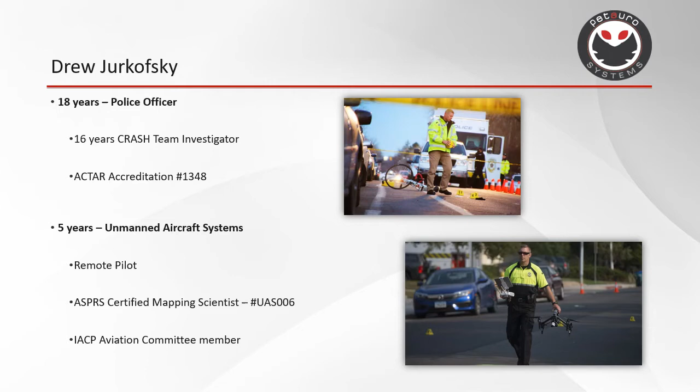I was also recently certified as a mapping scientist through the American Society of Photogrammetry and Remote Sensing. I also stay active in several different committees, one of those being the Aviation Committee for the International Association of Chiefs of Police.

So to get started, let's talk a little bit about how we have always investigated traffic crashes in the past. When I started doing this, we were using everything with measuring tapes, whether it would be tapes on the ground, whether it be roll tapes. Eventually, we graduated onto total stations, and honestly, my agency today is still using total stations for most of our measurements. A lot of people will say that once you get drones, you can throw your total station away, and that's simply not the case, or at least has certainly not been my experience.

All of our aerial imagery in the past has come from fire trucks. We were lucky enough to work very closely with our fire department. They would bring a fire truck out and let us take aerial images from that. This was really good for demonstrative purposes during courtroom presentation, but it wasn't useful for metric and measurement sort of use. I could show you the picture up here and explain that these were tire marks, that there were striations in them, and what that meant as far as the dynamics of the vehicle. But I couldn't tell you exactly how much distance there was between either one of those tents.

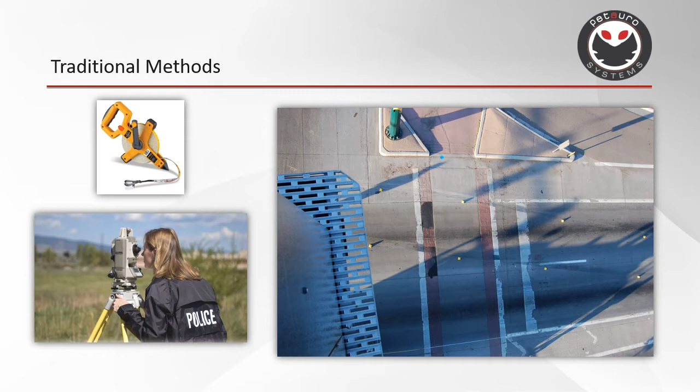The problem with fire trucks tends to be that we can't just put them anywhere. They can usually be set up one time. We can take aerial images for whatever the ladder can reach. But we're not going to put these in people's backyards, and the firefighters probably aren't going to let us move these multiple times because it just takes so much time and energy on their part. So this is what we had. So now what are we moving on to from there?

In 2014, I participated in a cooperative research and development agreement with the National Institute of Justice. At the time, NIJ was very interested in using drones for faster traffic accident clearance. We've all heard the case studies, and we've heard many times how drones increase the efficiency of the investigation on scene and the accuracy of the product. In 2014, that wasn't the case. We didn't know how drones could be used or if they would be useful.

A big part of this study was determining the appropriate level of overlap, testing different altitudes for image resolution, and developing methodologies for collecting this imagery and checking to see what our actual errors were, and then comparing those accuracies with current methods, and then timing that to see what the efficiency was compared to current methods.

All of this culminated in several different mock traffic accidents where we did head-to-head comparisons with a normal crash team investigation. In those different studies, this mock accident would be set up, and the traffic team that we were essentially having this competition against would get timed from when they could open the doors to collect all the equipment out of their vehicle, set it up, collect the measurements that they needed, pack all their equipment away, and shut the door. So essentially door to door. And then the same time was taken for the drone. How much time did it take to set it up, to mission plan it, to fly it, to break it down and put it away?

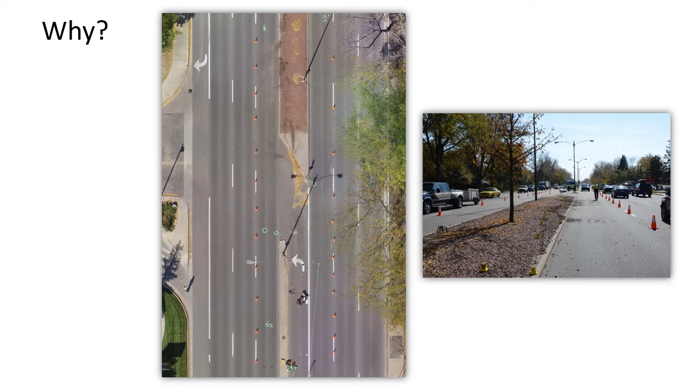So you've seen some of the pictures and the ortho photos, but why is it that we're using drones for crash investigation? Well, the first reason I would say is for efficiency, that it does save us time in doing scene diagrams for us to use drones instead of traditional methods. That said, please, please, please do not go to your bosses and tell them that you're going to be able to map a scene and clear it in 15 minutes or a half an hour or an hour.

It doesn't mean that we're not going to still do all of our normal traditional ground processing that we would. We still have to identify the evidence. We still have to take close range pictures of it. We're not going to get pictures of fibers or skin or blood on the roadway like we would on the ground taking these pictures from the air. So we still have to do all of the normal evidence processing and collection that we would on the ground. Where this saves us time is when we go out to measure the scene.

This is a crash that we investigated that was on a major thoroughfare through our city. It has 3 lanes in both directions. For us to have measured this with a total station would have easily taken us probably 2 to 3 hours if we wanted to get all the lanes and if we wanted to get all the sidewalks, etc. This was a motorcycle that was heading down the road, lost control in the center of the street, rolled into the center median. The driver, unfortunately, was not wearing a helmet and was killed at the scene.

As you can tell from the image on the right, this was in the middle of the day. This was right around 1 o'clock in the afternoon on a weekday. We had traffic absolutely snarled. We were trying to break down 1 lane in both directions. What I asked my supervisor in this particular case, this is actually the one that really got us motivated as a team to show what the capabilities were. I asked my supervisor to give me 5 minutes after we had the opportunity to mission plan all of this to shut down the entire roadway so that we could map it and then open the roadway again.

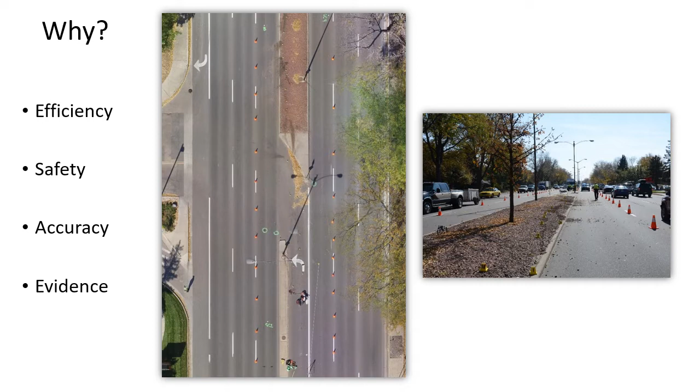This particular presentation is geared toward traffic crashes. In a traffic crash, we're almost always trying to create a map that's for measurements and for criminal prosecution. That means that we're going to have to be able to walk into court. We're going to have to be able to give some sort of an error estimation as to what the error of the map and the error of our measurements are. It's going to be critically important as we're moving forward for this to be adopted in most of our courts.

So let me give you a case presentation. This will be a step-by-step example to show you how it is that we're using this technology and how I believe other agencies can use it as well. So this was a traffic crash that happened in a rural part of our city. You can tell this is a Pix4D example. This is kind of the Pix4D map that you would see once you import your data.

What happened here is there was a Corvette with a couple of young men in it that were out driving around at nighttime. Of course, they were driving above the posted speed limit with their Corvette. They went through this cross intersection and didn't realize they were approaching a stop sign. By the time they did realize it, they could not stop, and they hit a vehicle that was traveling southbound through that intersection. They had the right of way, broadsided them, ended up killing both people in that car.

This happened at nighttime, as I said, and since this was rural, this was a very dark area of the city. So I'm showing you an area that was dark, and what that would turn out looking like. A little bit closer in, I wanted you to see the flight paths that were flown for this particular mission. So there were, I think, 3 different flights that were done. The first was a nadir flight, which was looking not perfectly straight down. It actually was about a 70-degree angle. But you can see the single grid kind of lawnmower pattern that we're used to seeing back and forth.

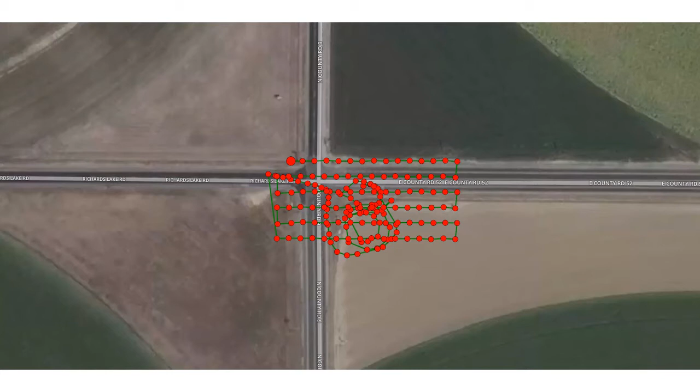After that was flown, we flew oblique patterns around both of the vehicles that were involved. And then all the other spaghetti stuff you see in there is us taking some manual imagery, flying through the scene and trying to take some images as we're going toward the vehicles. This is what it looks like once we bring it into Pix4D. So you can see the 2 different flight altitudes that were used. Primarily, I believe this was flown at about 75 feet for the nadir-facing imagery, and then about half that, usually right around 35 feet when we're flying these obliques. There were very few obstructions in this particular case, so we were able to fly a lot lower and keep everything at about the same altitude.

All the points that you see at the bottom there are tie points. Tie points just mean that those are pixels that are similar in at least 3 or more images. So photogrammetry is going to tie those pixels together. It's called a tie point, and there tends to be 1,000 or more of those per image. So it's actually a very robust model for taking measurements once we've quantified what our error is.

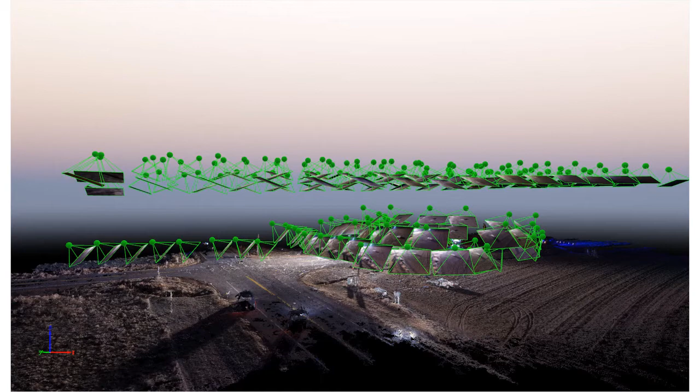So let's go through the nuts and bolts of how we're going to measure this scene while we're there. We're going to need to be able to scale this map as well as quantify the error for us to use later. So the first thing we're going to do is set ground control. Ground control is spread throughout the scene. Typically, we want to have it on the 4 corners of where we want our map, as well as something in the middle. Our agency typically uses 5 ground control points for most of our scenes. Unless you happen to have a scene that has multiple acres involved, you can usually get away with this number of ground control points for, say, a 1,000 by 200 foot scene.

Ground control targets are labeled here for you to see. If you look really closely, you can see the little pins where Pix4D has placed them because I've marked them in the images. But the way we mark this on the scene is actually very simple. We went to Home Depot. We got some circular white furniture movers. We put a little dimple directly in the middle of those furniture movers. We used some double-sided tape, stick them down on the asphalt, and then we label these 1 through 5 for our 5 ground control points.

We're going to take our total station, put the tip of our prism rod right in the center of that dimple of the target, use a stabilized prism pole, and then we take measurements to it. That's going to be our control, if you will. That's the known. And that's how we're going to set the coordinate system, and that's how we're going to scale this. You can use a traditional total station with an arbitrary coordinate system, or if you have a GNSS system, you can also use latitude, longitude, and elevation, whichever one you're using. But again, this isn't anything super hard. It's more a matter of where you place them and making sure they don't move once you've measured them, so you get them in the imagery.

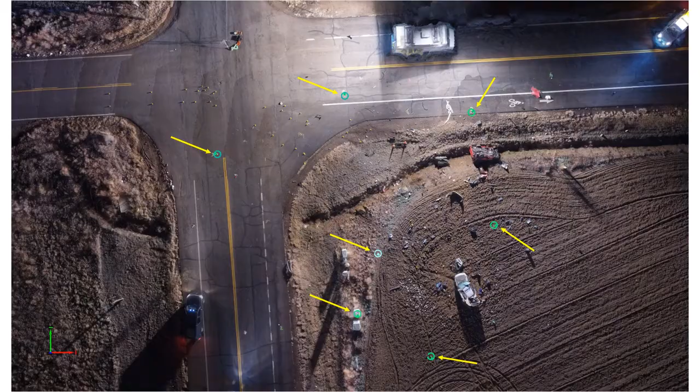Once we've collected all of our data at the scene with our total station, this is essentially what the layout is going to look like on a diagram. So you can see the different ground control points and their spacing. You can also see the different checkpoints. Checkpoints, we typically label those by alphabetic letters, whereas the ground control is by numbers, so that way our team can tell the difference between the two.

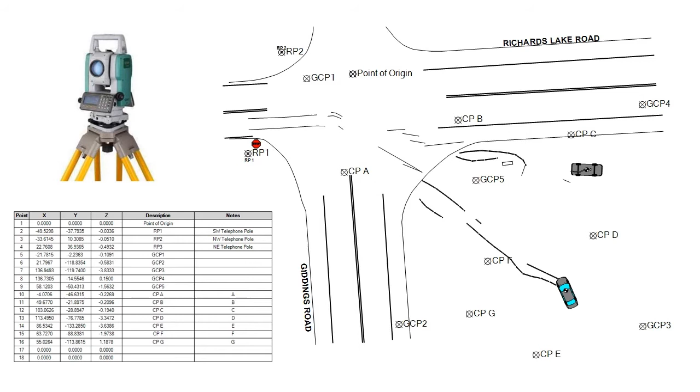You can see all the actual measurements underneath of the total station there for what we actually measured. This is really all the measurements that are done at the scene. We collect the measurements with the total station, we take the images with the drone, and we're done with taking our scene measurements. That's the amount of time it takes for us to do a scene diagram.

So when we get back to the office, we're going to put all of our imagery into Pix4D and we're going to process it. Once some initial processing is done, we'll be able to go in and mark our ground control points and our checkpoints to tell the software where those are located in the imagery. Once that's done, we're going to be able to generate a quality report. Sometimes that's done for us, sometimes we need to ask the software to do it for us. But I wanted to go through a couple of boxes in that quality report to talk about errors and accuracies.

So in this very first box, this is at the top of the report, it tells us essentially what camera we were using, what the sensor looked like, but it gives this value for ground sampling distance. So let's talk a little bit about that because I hear this used a lot. The ground sampling distance is the distance between the center of one pixel and the center of the pixel next to it at the ground level. So this is dependent upon the size of your sensor, your focal length, and the altitude at which you're flying.

This will change for a given camera at the altitude you're flying at, that the higher you fly, the higher your ground sample distance will be. This is not related to the error or the accuracy of your map. This is far more related to the resolution of what objects you would expect to be able to clearly see in your imagery. So just be aware of what that is telling you. In this particular case, we're at 0.38 inches.

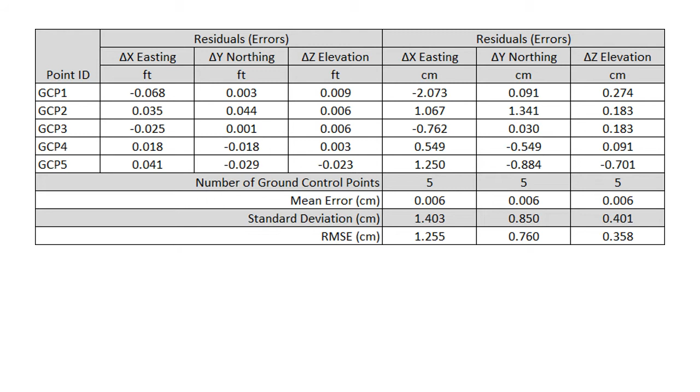Okay, so we're going to get in the weeds a little bit here, so don't gloss over on me just yet. So let's talk a little bit about the errors in this. I've just brought in the exact same thing you saw from Pix4D for the ground control points. So you can see our 5 ground control points over here on the left. We have our difference between what the total station says they should be and where the position was in Pix4D for the model. And there's some differences in all of those.

So essentially you've got this fixed model that can't move, and you're trying to make these 5 points fit on these known 5 points from the total station. It's kind of like all 5 points are on springs, and it's trying to find the best fit for those 5 points, and then it locks it in place. Because it doesn't fit perfectly, there's going to be some error for all 5 of those points, and that's what we're seeing here.

So we get it reported to us from Pix4D in feet. That's how I have our total station set, an arbitrary coordinate system in feet, and so that's why it's giving it to us in feet in Pix4D. I now have converted that over to centimeters, and as we go down towards the bottom, you can see that we have done some calculations for mean error, standard deviation, as well as the root mean square error. So what we're really interested in is the RMSE.

So by these standards for ASPRS, here's our root mean square error. Our ground control must be 4 times more accurate than our map class. So in this case, our greatest error is in the X direction. It's at 1.25 centimeters. So we have to be 4 times that. Our map class can't be any less than 4 times that number.

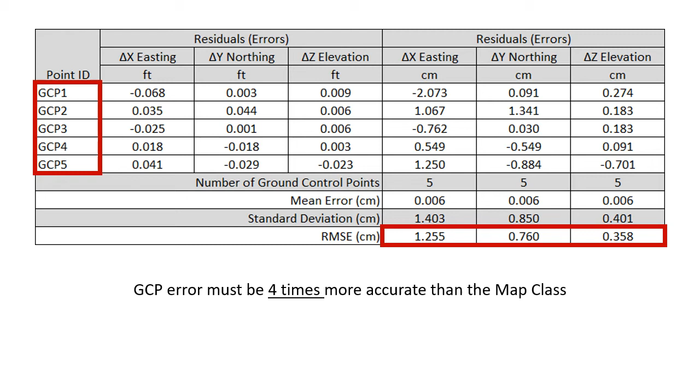So just to keep it simple, we'll just call that a centimeter to keep the math simple. So if we have a centimeter of error, it means that we have to go with a 4 centimeter map class. We can't do anything less than that because of that error rate.

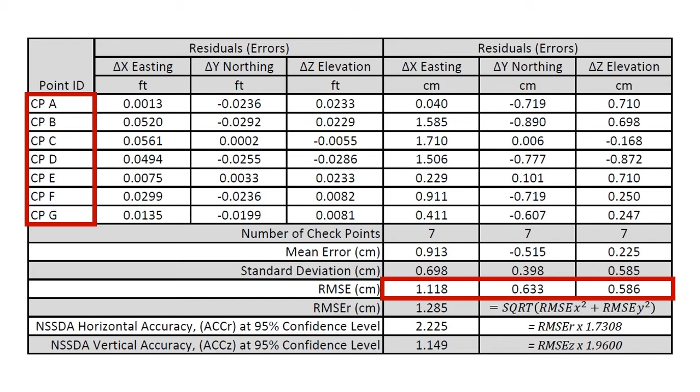So again, by ASPRS standards, this is supposed to be 3 times more accurate than our map class. This is actually better than that, so we definitely meet those standards. So you may stop and ask yourself at this point, well, doesn't that mean that all of our measurements are at least within 1.118 centimeters? No, that's not what this means.

This just means that for those 7 points, this is the average. It's not really even the average, it's the root mean square error, which is a slightly more robust calculation than average. This is the error of those 7 points. A point cloud is made up of millions of points. We don't know what the error is for all of those other millions of points. This is just telling us what it is for those 7.

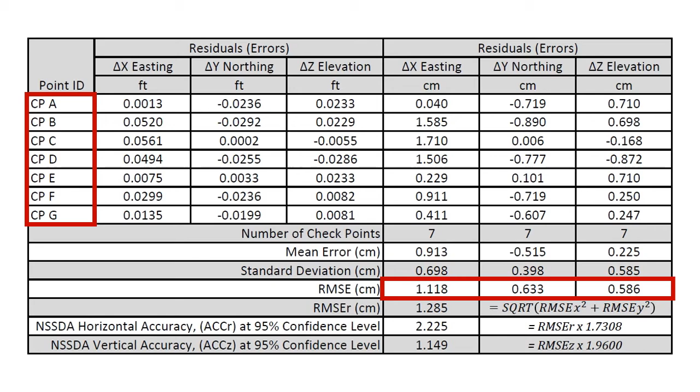So that brings us to our positional accuracy statements. What we just saw was the accuracy of our 7 checkpoints. Those are 7 single measurements within a point cloud of 1, 2, 3 million points. We can't possibly measure all of the points in our point cloud to know what the error is over the entire thing.

So what we have to do is make a confident statement based on a confidence interval. This is all going to be based on statistics, that we're basing this on the assumption that the error throughout our map is normally distributed, and that at 95% confidence or at 2 standard deviations, we can report that as a confidence interval. The math behind this is presented in that positional accuracy document that I showed you earlier through ASPRS, so I'm not going to get into it here.

Essentially, the statements we're going to be able to make are that the actual positional accuracy was found to be an RMSE X of 1 centimeter, RMSE Y of 0.6 centimeters, which equates to positional horizontal accuracy of plus or minus 9.7 centimeters or 3.8 inches at a 95% confidence interval. So essentially, any measurement that I make from point A to point B in my point cloud that's in the horizontal plane, I can say that it is this distance plus or minus 9.7 centimeters or 3.8 inches.

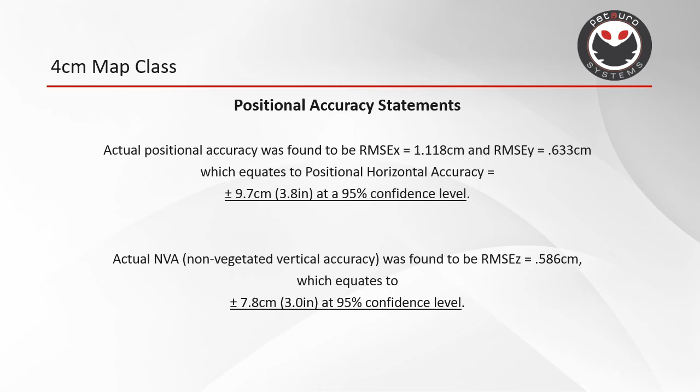Okay, so now we know what our map class is. We know what our error rate is. This is still back at the office. Now we can start building the rest of our reconstruction. So typically what we will do is we'll go and we'll mark all of our evidence points in Pix4D. You can see all the different tents that we laid out at the scene. We mark all these evidence markers in the picture, and we're able to show them here. This is just a quick screenshot.

So with these points, I can now export them out to whatever diagramming software I use. Your agency probably uses a different program than mine does, although we all tend to be fairly similar. But essentially, I can export this out as an XYZ data set, the same as I would get from my total station, and I can import that into any of my favorite diagramming software packages to create my wire diagram.

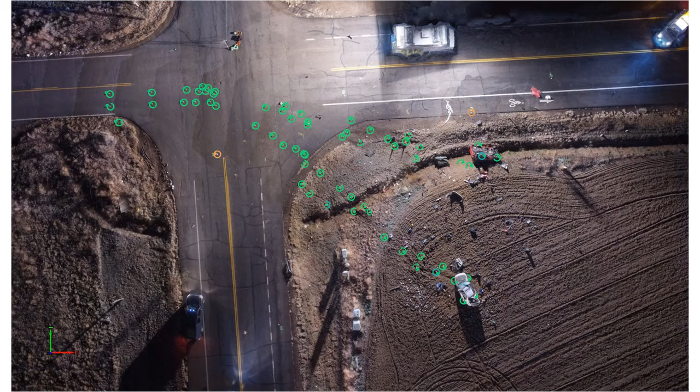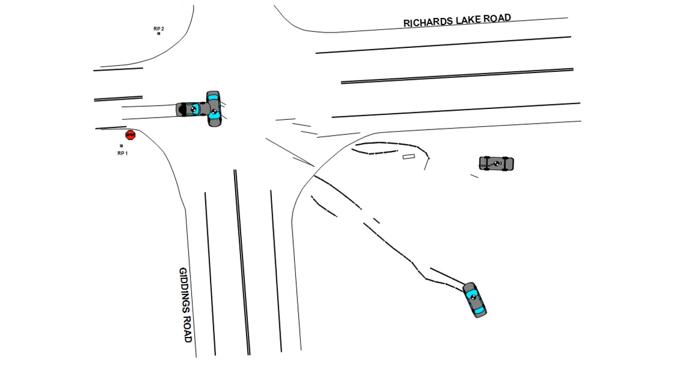So here's what our typical wire diagram looks like. This is what we've been using for years with our total station. This still works just great. I honestly, for a lot of my reconstructions, don't necessarily need all of the other data that comes with some of the imagery. This is really good for me to see how the vehicles hit one another, where they were positioned in the roadway. It's also really helpful for me to pick my angles, which way cars are going.

So when we're doing speed reconstructions, we need to know what angles vehicles are coming in at. We know what angles vehicles are going out at. I can very clearly see on this which direction each of those vehicles are going. The other piece of that puzzle, though, when I'm trying to do a speed reconstruction, is the drag factor. How much friction is there on the roadway? I can quantify the amount of friction for the asphalt surface. I can quantify the amount of friction going off into the dirt.

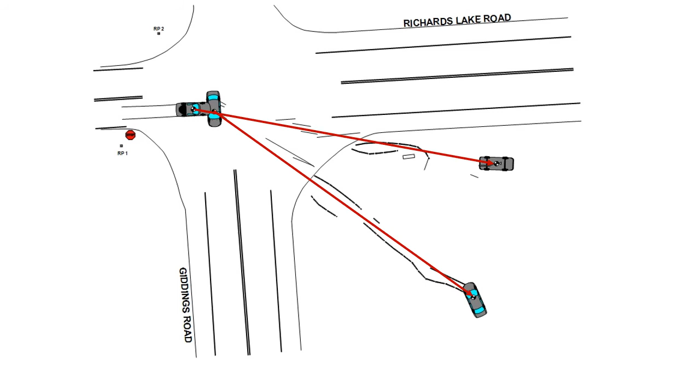But both these vehicles went through ravines. They both hit hard on the sides. One of them flipped over. One of them furrowed very deeply going out into this nicely plowed field. We don't have values for that. We're going to have to estimate it. And when I go to estimate that, there's going to be lots of experts who are going to have obviously different estimations than me. So I want to be able to explain to a jury why I chose the numbers that I did.

This is actually a more useful diagram when I'm trying to figure out what my drag factors are. Again, we can still see the vehicles at impact. We can still see how all the roadway markings line up with the evidence tents that were put out at the scene. But it's much easier for me to describe how each vehicle acted dynamically as it went through either the canal or the Corvette that hit that utility box and then flipped over onto its top.

All of those are going to be drag factors that I'm going to have to take into account, but I can better describe them and I can better calculate out the distance traveled through each one of those different scenarios based on this picture versus the other one. It's also useful for me to be able to show a jury exactly how much friction we're talking about. So in this particular case,

we can see that this car was coming off the road going almost sideways. It impacted right here on the side of this canal, spun, and then is furrowing fairly deeply going off into this freshly plowed field off to rest. So this is all going to be important for me to be able to explain to a jury.

Again, our Corvette over here goes off the side of the road. It hits this utility box, actually takes the box out, and then it flips over onto its top. So as I'm trying to explain to a jury what drag factors I used, this is a very useful tool for me to help them visualize how much energy would have been expended through each of these different routes.

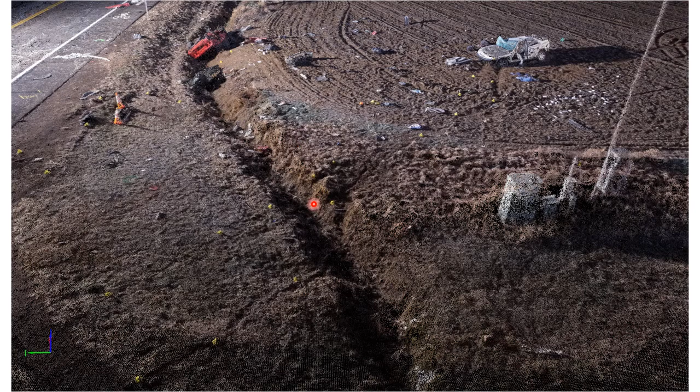When we talk about data and how much data is actually collected, what's nice about any photogrammetry software, again, this is the Pix4D version, is that we can collect measurements from the vehicle to anything. So in this particular case, one of the occupants of this vehicle was found just upward, I guess, from the vehicle in this particular picture. But if we want to know what the distance was, we can actually calculate that out. We can pick our points in space.

So as we were talking about earlier, every scene where we forget to take a measurement, or every scene where we didn't know there was information that was actually there that we find out about later, someone tells us, oh, that piece of debris was actually relevant that we didn't know at the time. We haven't lost anything. We can always go back. We can still measure it. We still have the same amount of error measuring to it. And we also have all these pictures of it, at least from the drone, that we can show where it existed at the scene. So we're not losing anything. We actually get far more data than we would have had otherwise.

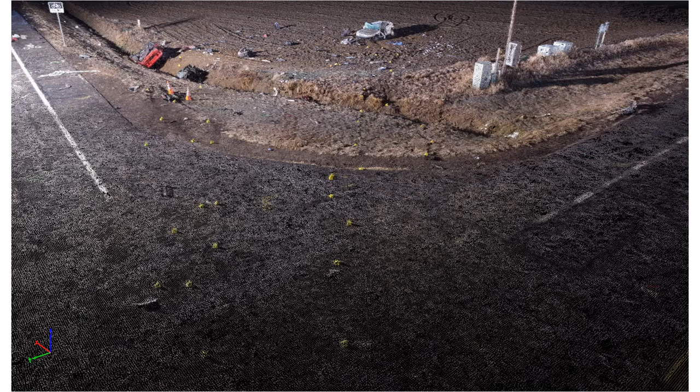One of the other deliverables is obviously a point cloud. This is where almost all of the work takes place. When we're talking about scene measurements, this is where all of that is done. We can do some cool things with animations and other models, but this is really where most of your work is going to occur, in the point cloud.

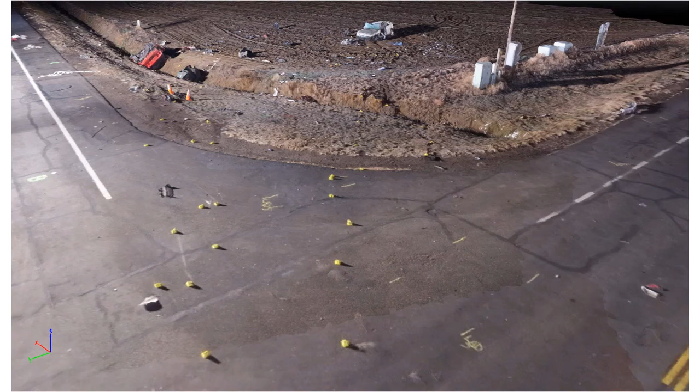So that's what I have for you today. I really appreciate you watching the video. I hope the presentation was helpful and it showed you some of the uses for photogrammetry.